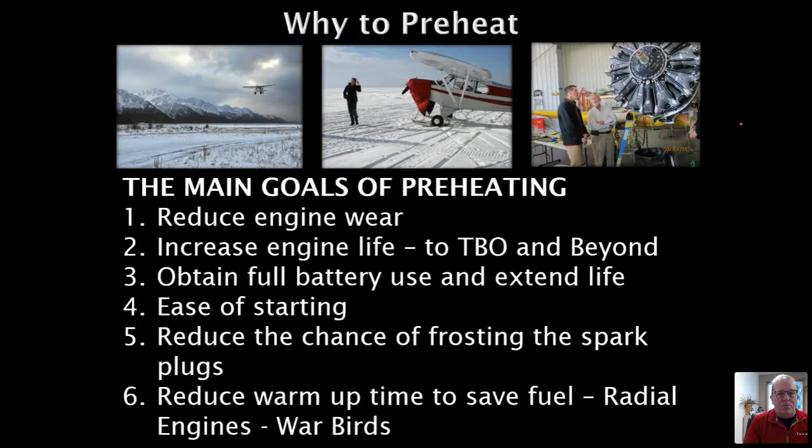And of course, especially flight schools, frosting the spark plugs can really ruin your flying day because it usually eliminates it. And we are now seeing a lot of radial engines and warbirds, open cockpits. They have to have oil temps at a certain temperature prior to flying, and we're helping them doing that.

Our piston engines, the cylinders have a taper to them, so again, expanding at different rates. Once the combustion process starts, everything starts heating up very quickly, but we don't get the proper oil flow. We might get pressure, but we don't get the proper oil flow through all of the journals and items that need to get the oil. So we don't want to be scoring your cylinder. Basically, we want to increase the ability for you to fly. So aviation safety does start with Tanis preheat.

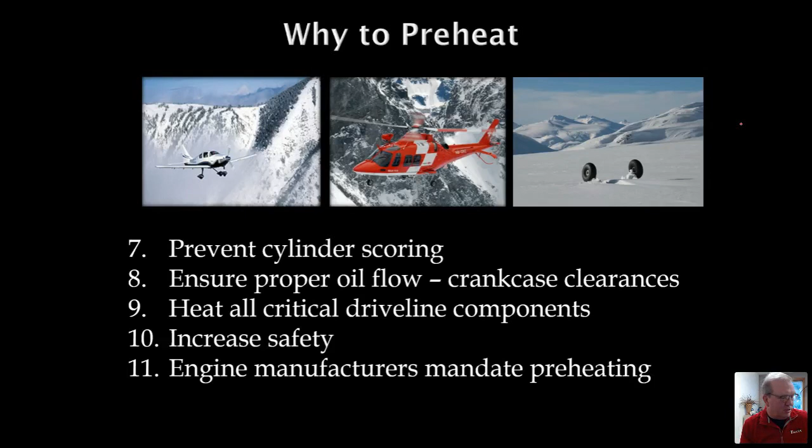And last and surely not least, as we just stated a little bit ago, engine manufacturers do mandate preheating at certain temperatures. So let's talk a little bit about what Tanis does when we look at saying, okay, we want to develop a preheating method that really works the best, covers all of the manufacturer's recommendations, and then even going up and above that.

So when we design a system, first of all, we want to see, and there's some variables in here, but number one, we design that system so that we get the cylinder head temperature about 50 degrees Fahrenheit above ambient. Now, granted, your ambient's going to be all over the place, and we'll circle back to that a little bit later in the presentation. So that's goal number one.

Goal number two, we want to get the oil temp at least 40 degrees above ambient, 35 to 40 degrees, but we also don't want to see the oil temperature above 120 degrees Fahrenheit and never warmer than the cylinder.

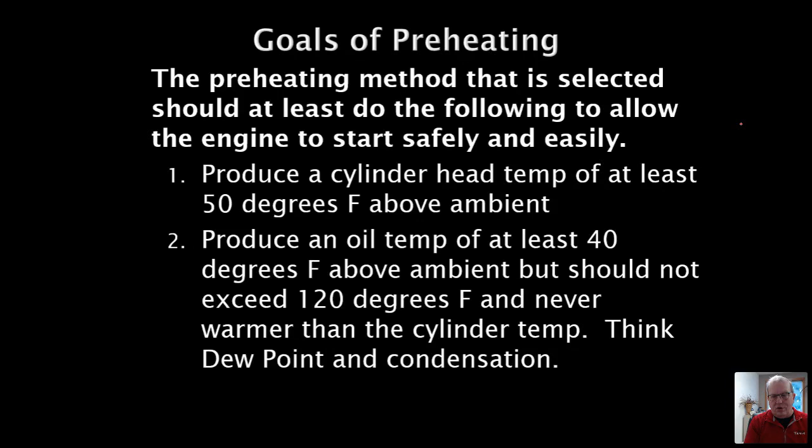And I'm going to jump into a little bit of physics, so there's a caution here. The reason we don't want the oil to be warmer than the top of your aircraft engine is moisture, water, condensation has been intermixed with our oil once we stop flying, and it will make its way to the bottom of the sump. But that water evaporates at any temperature. Of course, when you're plugging in a preheat system or heating it up, that evaporation rate expands and goes quicker.

And we talk about the wet washcloth. You leave it when it's hot and humid in the summertime, it stays wet all day.

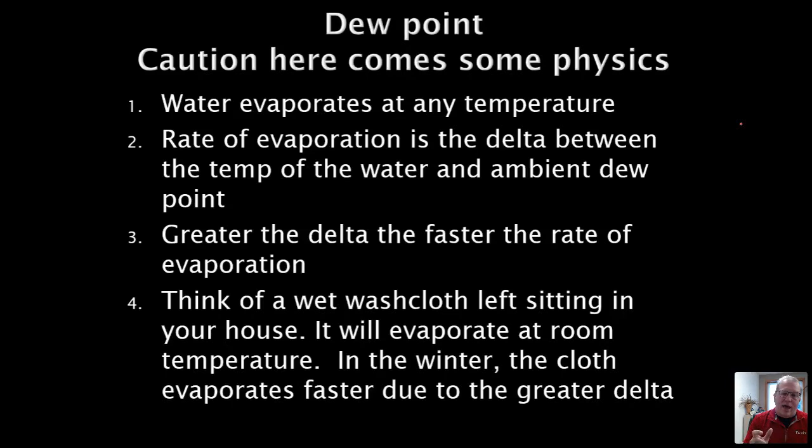But if you leave it in your house in the wintertime when we're using firewood or other type of heating, the delta will dry that washcloth off so quickly. So that's the physics side of it.

We want to make sure with our multi-point preheat system that we get the cylinder warmer than the oil, so that even then that moisture evaporates out of the oil into your crankcase. It cannot condense on anything because that metal, your cylinder, your piston, your valves, your cams on some of the aircraft engines are not covered with oil at that time, and they really could end up being cooler than the oil, and then that moisture will condense on it.

So we've designed our complete preheat system in such a way that you can leave it plugged in all the time. And I was answering a couple of the questions in the Q&A before I jumped on, because once I share my screen, I don't see the Q&A anymore.

That's why we say we can leave ours plugged in all the time. There's a reasonableness factor. If you're not going to be flying for several months, then you should look at ways to preserve your aircraft engine, and depending on if you have a partially heated hangar, things like that. But ours is really the only system that does that, because you will be able to see, and the slides are a little bit further down the line here, we get everything warmer than the oil. And that is the key of what we're doing.

And here's something I really want to be able to cement into your minds. We give you all this information. We're going to say, here's what you want to do, but you can test this out yourself. You can do really similar tests that we do by just taking a look, if you happen to be flying this aircraft, or if you have an engine monitor, you have cylinder head temperature and oil temperature at your disposal before you start that aircraft engine.

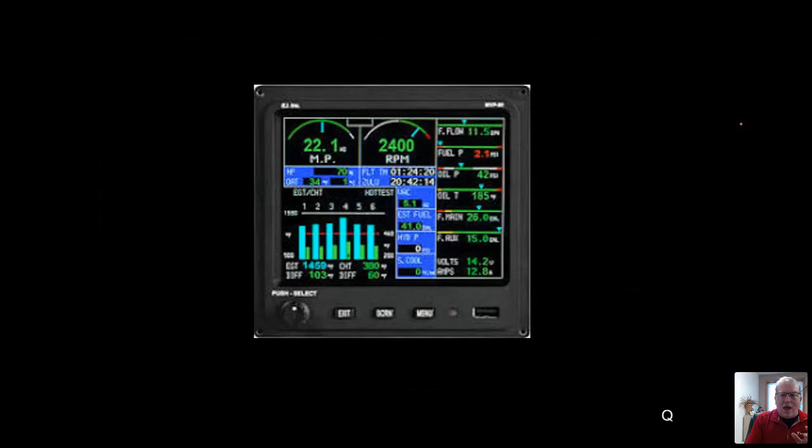So that is item number 2 that I wanted to leave you with. You have data that you can use to make a determination what's going to happen when I start up this aircraft engine.

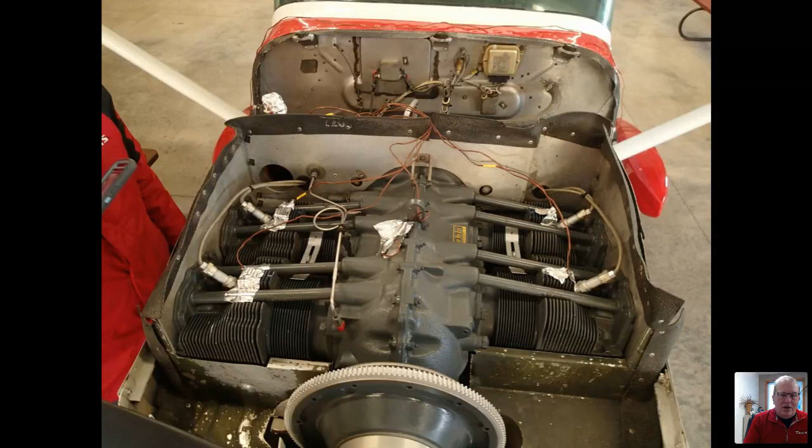Now, we, of course, use data loggers that are NIST traceable. So you see the little calibration tags on all of our thermocouple wires, and we take them and put them all throughout your aircraft engine opposite of where we're heating it, and we will put one down the oil fill tube to get one in the oil, so we get the oil temperature. Because even though I said you have that at your disposal with an engine monitor, that oil temp gauge may be someplace not necessarily right sitting where your oil temp is in the bottom of your sump.

So we go out and do temperature mappings all the time with insulated engine covers, without insulated engine covers, in a partially heated hangar, in an unheated hangar like you see right here. And then we get this data back.

We can do these tests any time of the year. It was 60 degrees, 65 degrees Fahrenheit. We got it up to 125, so that's our 50 to 60 degrees above ambient. And the oil temperature was 100, so we got that 35 to 40 degrees above ambient.

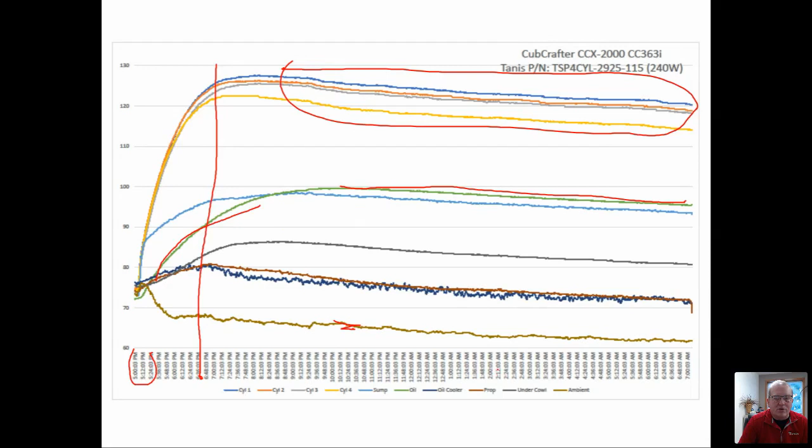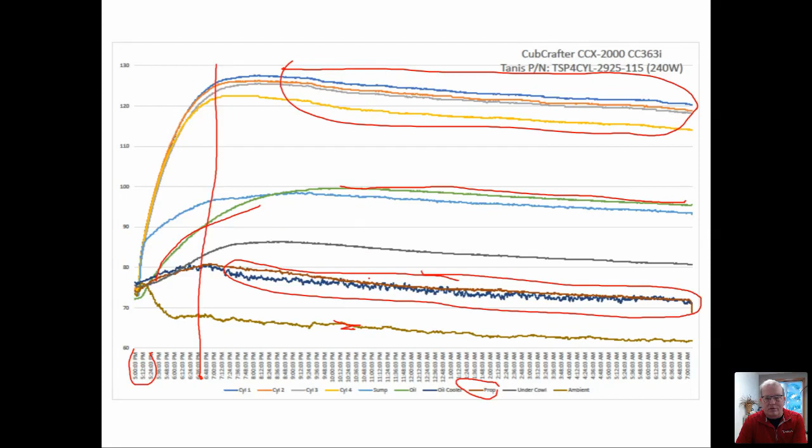One item that you will also see, I know it's probably an eye test here. Here's our prop temperature. We actually take a thermocouple and put it on the prop too, because you'll notice when we're preheating, guess what? We're also heating that wonderful, great big spinny thing in the front of our airplane. So if you're really in cold operating climates, having a prop cover does also give you some more utility, because we are losing heat outside of that prop.

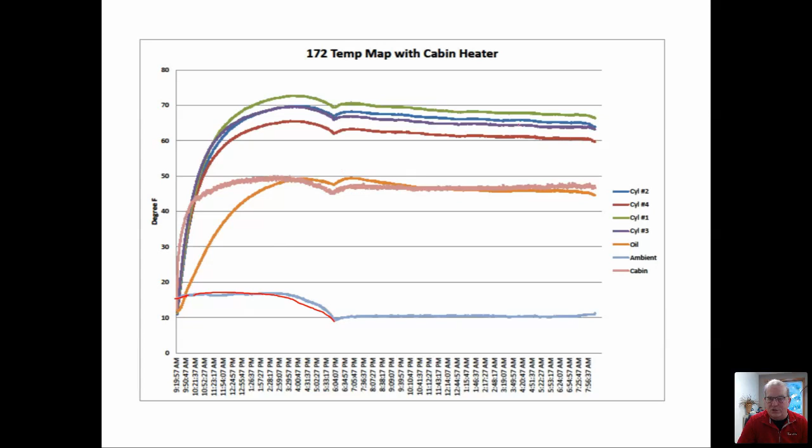The temperature in the hangar dropped down 5 degrees, so you're going to see that drop, and then it's just going to ride that curve throughout that period of time. But some people are saying, wow, 50 to 60 degrees, that's great, but I like to fly when it's much colder than that, all Fahrenheit. I need more heating than what your 50 to 60 degrees and 40 degrees above ambient will do.

That is when the insulated engine cover comes into play. You can just about double your performance of the heating if you use an insulated engine cover. You'll see the same thing we talked about earlier, an hour and a half to 2 hours - that's actually an hour, that one jumped up. We're at our optimum temperature. Then we added an insulated engine cover, and we got that. But it takes a lot longer period of time. So now you're talking about at least plugging it in the night before or the day before you go flying if we need that additional temperature.

Here's one where you do a bunch of these tests and get the data back, and you all of a sudden go, what in the world is happening here? We didn't have this great little line telling us that to start with - we had to figure it out. This was a flight school. They tuck in about 7 or 8 aircraft inside of a very large hangar with a large hangar door. The temperature of the cylinders was bouncing around all over the place until they closed the door. It wasn't that windy of a day - it was just showing you how effective our air-cooled baffles are on those air-cooled aircraft engines.

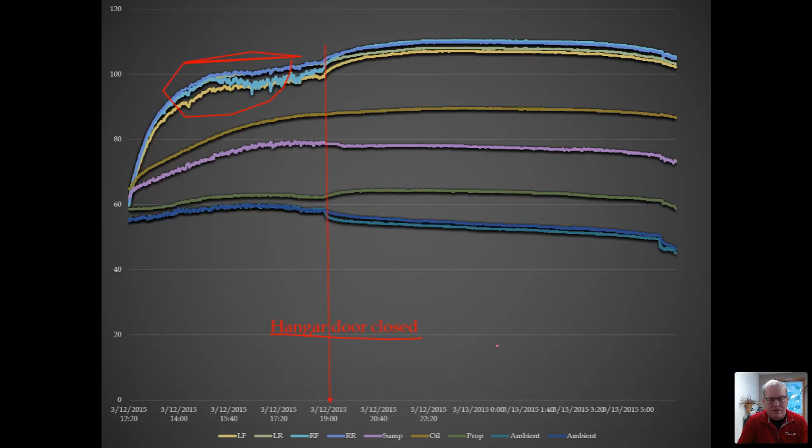So cowl plugs, another really, really important thing to use. If you're going someplace flying and you're going to be there for an hour and a half, 2 hours sitting outside, a set of cowl plugs will get you a long ways, even if you don't have an insulated engine cover. So we wanted to show you that so you could get a picture of what happens.

Now we're going to make a transition to say, well, there's many different types of preheat systems - furnaces, hot air that's blown in there, sump-only preheat systems, insulated engine covers, etc. We do tests on all different types of those. We had a flying club challenge us, saying, well Doug, we use a sump-only preheat system and we have an insulated engine cover that we put over top of it the minute we're done flying, and boy, that engine, I'm sure it's all the exact same temperature. Well, we did a test for them, and what they found out was a little shocking.

Even with that insulated engine cover in there, you see this difference of temperature. This is their oil, here are their cylinder head temperatures. You've just set yourself up for a case where a question was asked earlier: can I leave mine plugged in all the time, or should I do it just before I fly? If you have a sump-only preheating system, you should only plug it in prior to flying, a couple hours before, because you don't want to plug it in the night before, have this happen, and then the weather closes in on you and you can't fly the next day, because now you've deposited some condensation above your oil line in your aircraft engine.

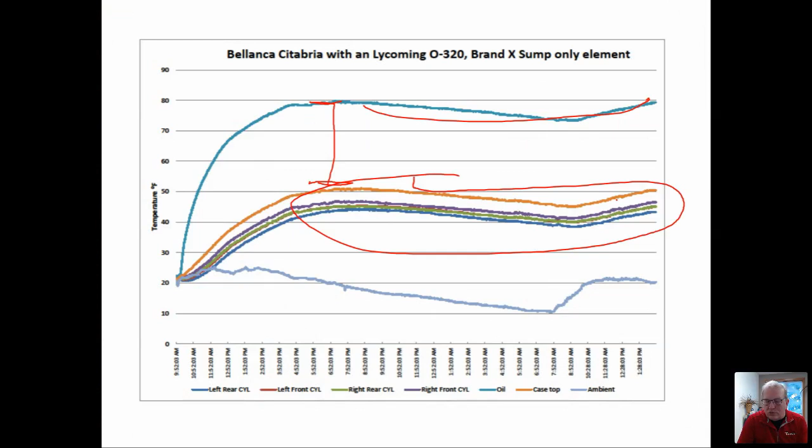If you fly it soon, you're okay, but if you don't fly for another week or two, you start going down a road we don't want to see. What happens now - we took that preheat system off that exact same aircraft engine and installed ours. Here's the oil temp, here's the cylinder head temperatures, and yes, you see that wide swing - we just follow that ambient curve. That is really the key of what we're talking about and what we're doing with our preheat system.

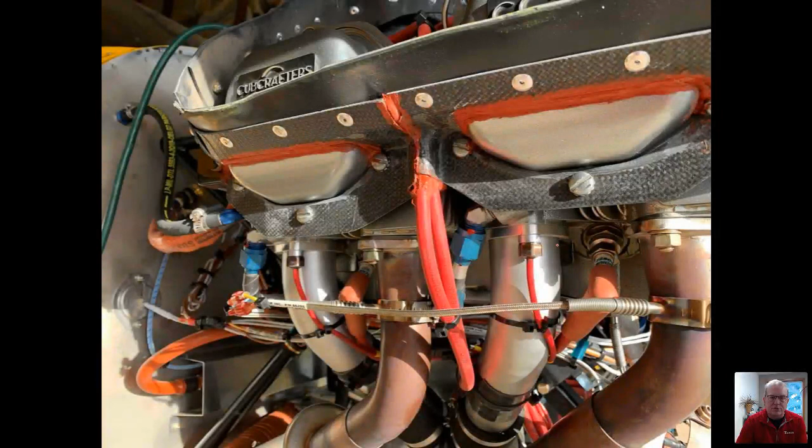So what is our preheat system? If you aren't familiar with TANIS, what does it look like? We have a threaded element, a little bolt.

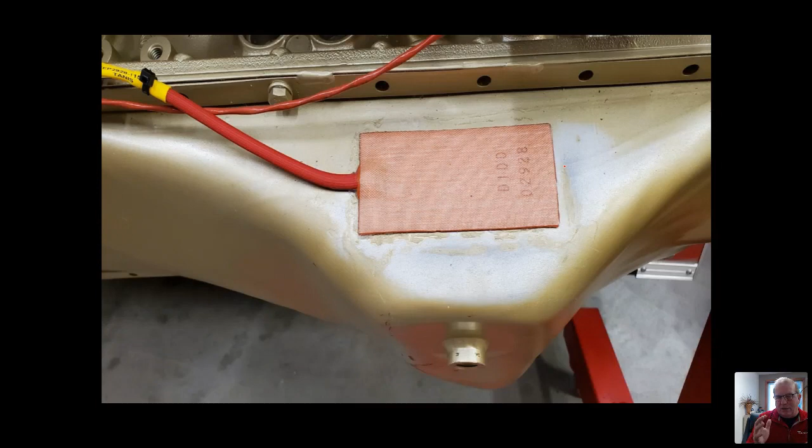We take either the intake tube fastener or one of the rocker cover fasteners and replace it with a heating element, one per cylinder, plus a pad that on a 6-cylinder aircraft you'll have one on top of the case and one on the bottom. If it's a 4-cylinder, it's just on the bottom of the case because the engine weight is less than the wattage needed to run all the way through.

So that's our system, that gives you the snapshot of it. Then the question comes, well, how do I know if my TANIS preheat system is working, or really anybody's system?

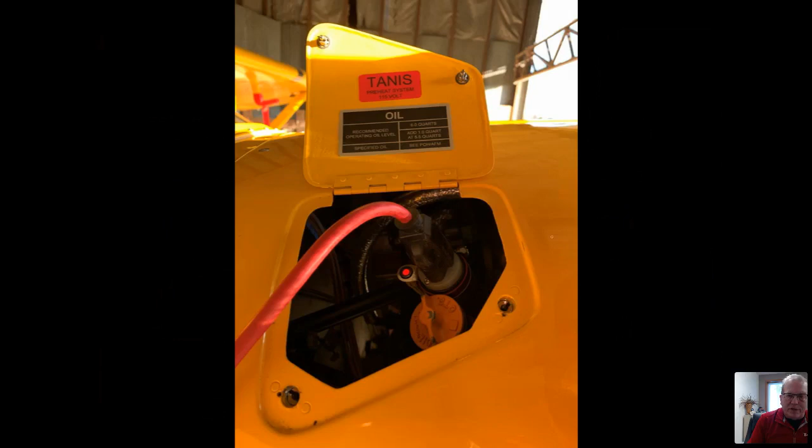I'll give you a real quick one. If you have an engine monitor, you'll be able to know it's working by looking at your CHT temperatures or your oil temperature. Or if you don't have one of those, and you have our system, we have an indicator light telling you at least you've got power to your system. It doesn't tell you every element is working, but you at least know the extension cord hasn't gotten pulled off from the other side.

But here's one real quick and easy way everybody can use. Keep these in your hangar wherever you plug your extension cord in - buy one of these inexpensive watt meters, maybe $30-40. Whatever system you're using, they should list the wattage. Our 4-cylinder systems run about 240 watts plus or minus 10%, because we do everything at 115 volts and 230 volts. Our 6-cylinder system runs about 460 watts. So that's a feedback mechanism to know that your preheat system, every element, is working for you. Very quick and easy.

So I said I was going to talk a little bit about installation and service. If the fuses are blown, you don't just replace the fuses and plug it right back in. You go take your ohm meter reading - hey, something's shorted out here. Now just disconnect - we have environmentally sealed connectors, they're Deutsch DT connectors, TE. You disconnect them, plug them back in, and check what your ohm meter does. Once you unplug the one that's shorted out, you'll see the ohm meter go up, and you can go from there.

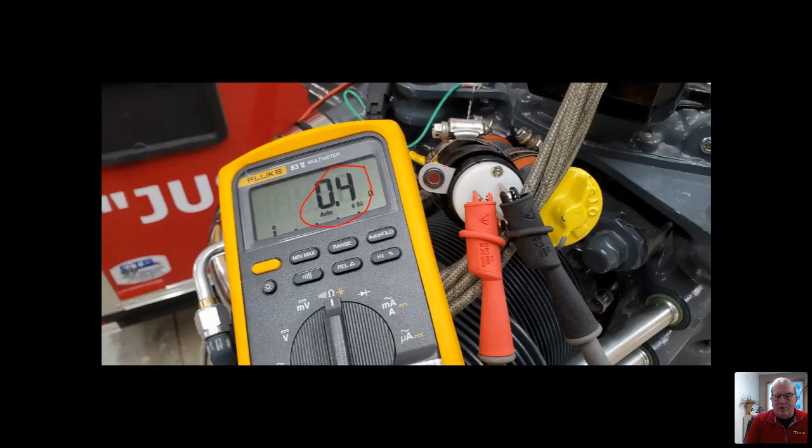A dehydrator does a great job of pulling that moisture out of your aircraft engine. It's really more for summertime flying, or if you're by the coast where you have salt water—really important to deal with, to get the moisture out so we don't deal with that issue.

One of the things I wanted to talk about—you can leave yours plugged in all the time, but there's a reasonableness factor. You don't have to. You can plug it in the night before, but some of us live 40, 50 miles away from the airport, and that's inconvenient.

We came out with a device just this past September called Switch-On, our preheat remote. We use the data side of the cellular towers to communicate with this device, to turn it on prior to flight—an hour and a half to two hours if you have a sump only, or the night before if it's ours.

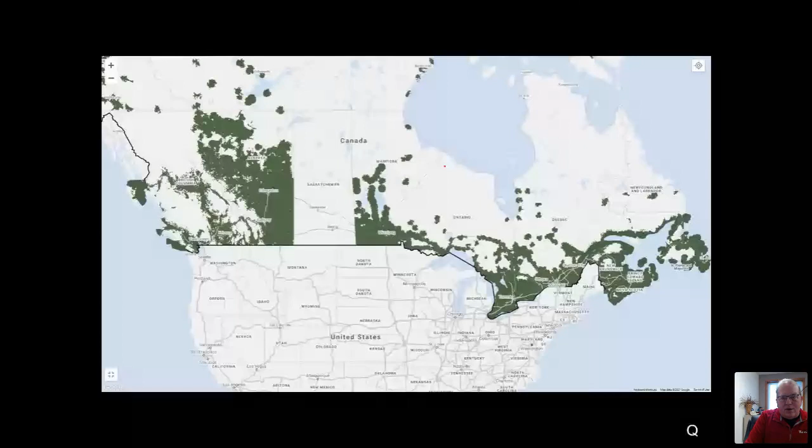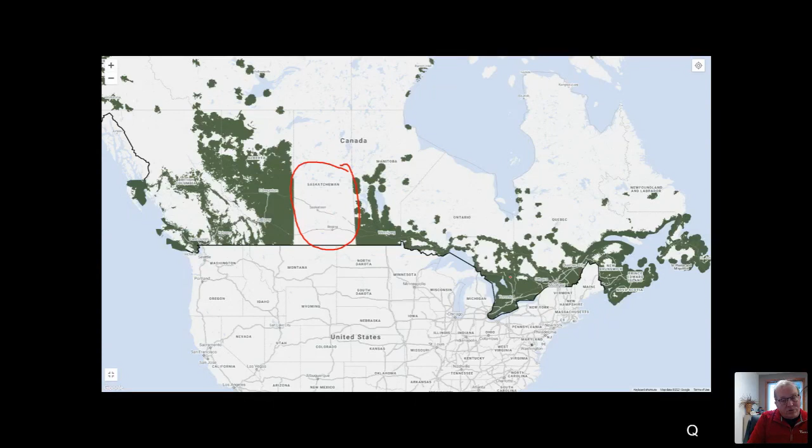We are launching that product out in Canada now. Go to switchon.ca or switchon.com, and if you're in Canada, it'll connect through you. We're using the TELUS network, so you'll see the green spots. For anybody in Saskatchewan, sorry, no coverage there. It doesn't have full coverage yet, but it's another option for you to be able to turn your preheat system on.

There are two channels on that item, so you could use one for a cabin avionics heater, one for your aircraft, maybe even two aircraft. You can share it with a customer of yours too, but I just wanted to talk to you about that item.

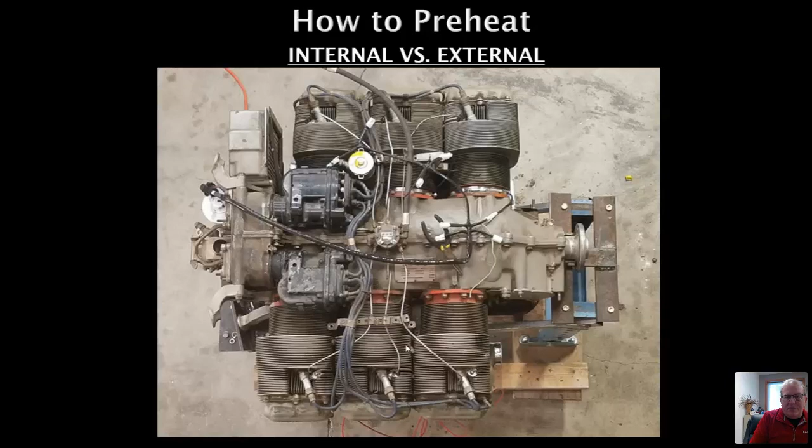Now, there are many different types of preheat systems. People will say, 'Hey, I use a heated blower to blow a lot of hot air underneath in the cowl, and that really warms up my engine.' Well, it does to the touch, but inside, it really doesn't.

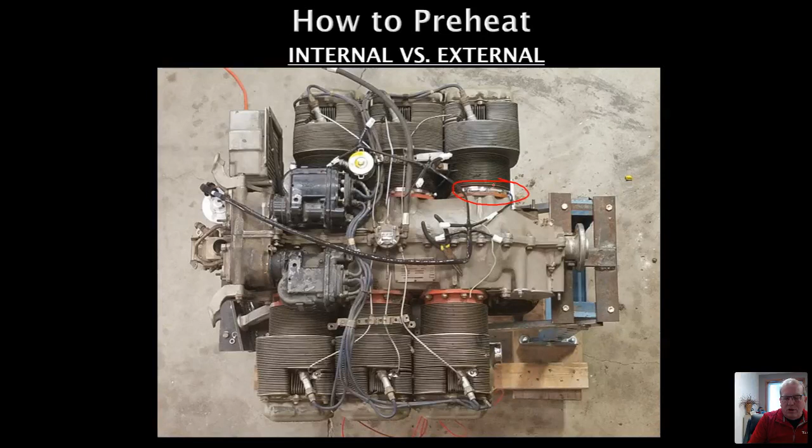There's another brand of preheat system that uses a hose clamp around the base of the cylinder. When we do a thermal imaging test on that, you'll see our preheat puts 50 watts of heat into each of those cylinders, and 100 watts of heat into others. The air-cooled baffles do a great job of cooling everything off.

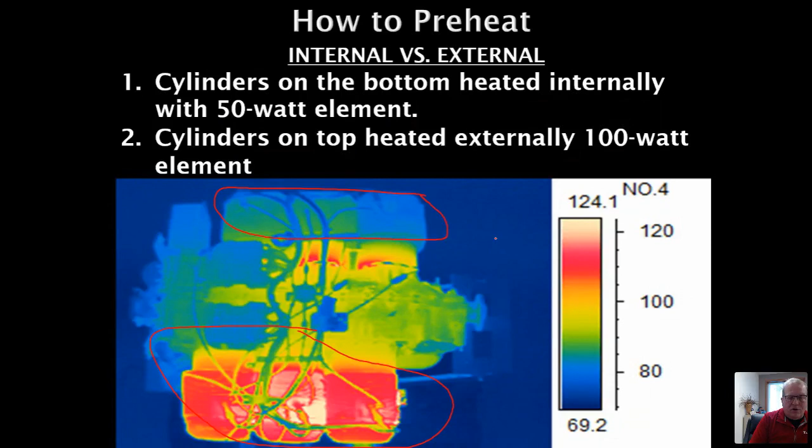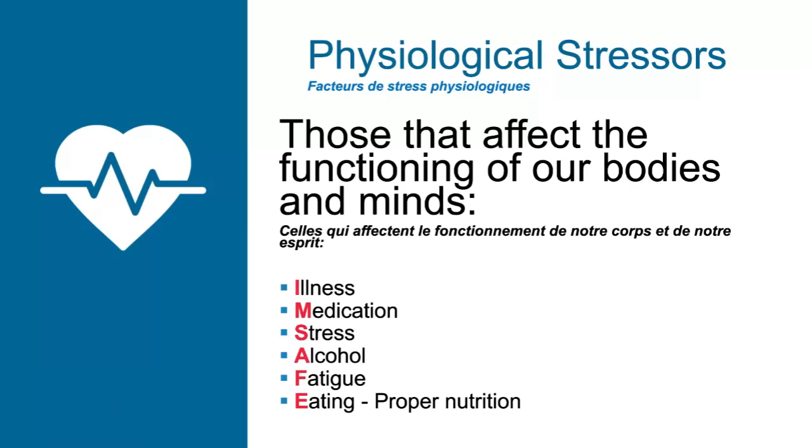Winter flying brings with it the risks of off-airport landings. How well prepared are you for the possible walk in the cold and/or the snow? Those lightweight boots you wore to the airport in your nice warm car may not be so suitable for even a short trek to the farmhouse in the distance if you happen to put down in a farm field. Now think about what happens if you land on a frozen lake miles from the nearest buildings. You and your passengers need to be dressed appropriately for the weather conditions on the route, not just for the drive to the airport.

Winter weather conditions vary considerably in cold climates. In the most remote sections of the world, weather reporting stations are generally few and far between, and reliance must be placed on pilot reports. However, don't be lured into adverse weather by a good pilot report. Winter weather is often very changeable. One pilot may give a good report, and 5 or 10 minutes later, VFR may not be possible.

Near large bodies of water, you may have to deal with highly localized lake effect snow squalls that don't show up in forecasts. Keep in mind the effects of local terrain. Even elevation changes of a few hundred feet can trigger localized weather. In particular, mountain flying and bad weather don't mix. Set yourself some limits and stick to them.

Setting up a winter-friendly route can be very important. If your trip is over highly populated areas, the risk of finding yourself in a winter survival situation can be minimal. However, most of Canada is wilderness, and it's not a bad idea to plan a route that keeps you close to a better chance for recovery in the event of a forced landing. Staying close to highways is a good strategy, and vehicles traveling on those roads can offer good visual cues regarding what may lie ahead. For example, if you notice the vehicles headed towards you have lights on in broad daylight, it may be a clue that you are headed to an area of poor visibility.

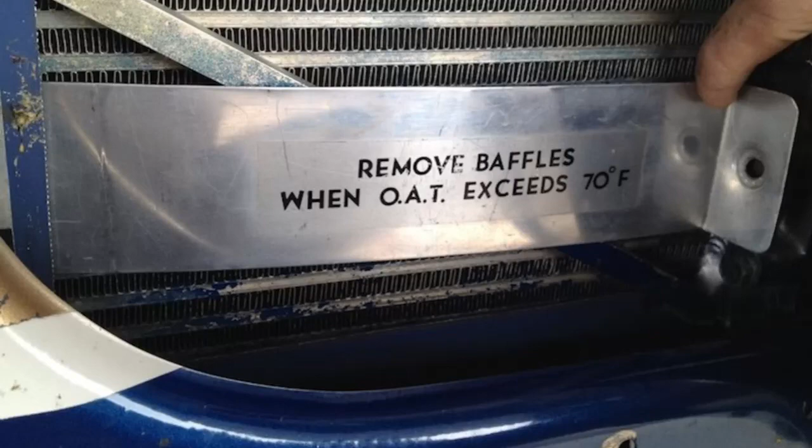For baffling and winter covers, be sure the winterizing of your engine follows manufacturer recommendations. Does your engine require a winter kit, such as air intake baffles to keep cylinder head temperatures within limits? Some engines require a baffle on the oil cooler air intake to keep oil temperatures within limits. Are these properly installed? When looking at oil, many engines require different grades of oil depending on the outside air temperature you may be experiencing in your region.

The crankcase breather deserves special consideration in cold weather preparation. A number of engine failures have resulted from a frozen crankcase breather line, which caused pressure to build up, sometimes blowing the oil filler cap off or rupturing a case seal, which caused the loss of the oil supply. The water, which causes the breather line freezing, is a natural byproduct of heating and cooling of engine parts. When the crankcase vapor cools, it condenses in the breather line, subsequently freezing it closed. Special care is recommended during the pre-flight to assure that the breather system is free of ice. If a modification of the system is necessary, be certain that it is an approved change so as to eliminate a possible fire hazard.

For hoses, hose clamps, hydraulic fittings, and seals, an important phase of cold weather preparation is inspection of all hoses, flexible tubing, and seals for deterioration. After replacing all doubtful components, be certain that all clamps and fittings are properly torqued to the manufacturer's specifications for cold weather.

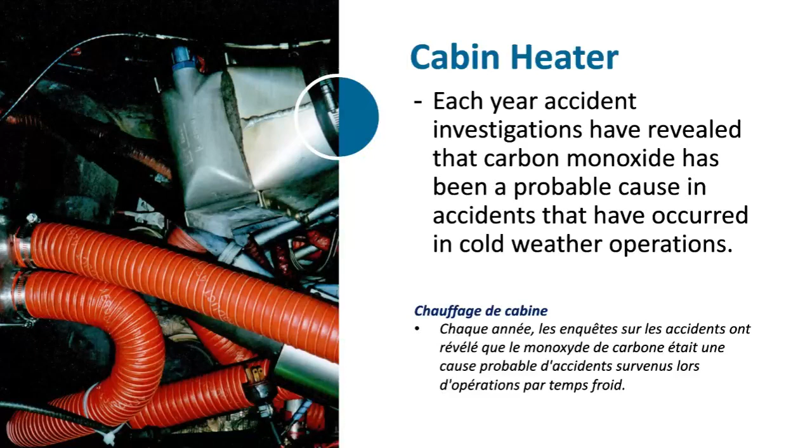Many aircraft are equipped with cabin heater shrouds, which enclose the muffler or portions of the exhaust system. It is imperative that a thorough inspection of the heater system be made to eliminate the possibility of carbon monoxide entering the cabin or cockpit area. Each year, accident investigations reveal that carbon monoxide has been a probable cause in accidents that have occurred in cold weather operations.

Because of contraction and expansion caused by temperature changes, control cables should be checked and properly adjusted to compensate for the temperature changes encountered.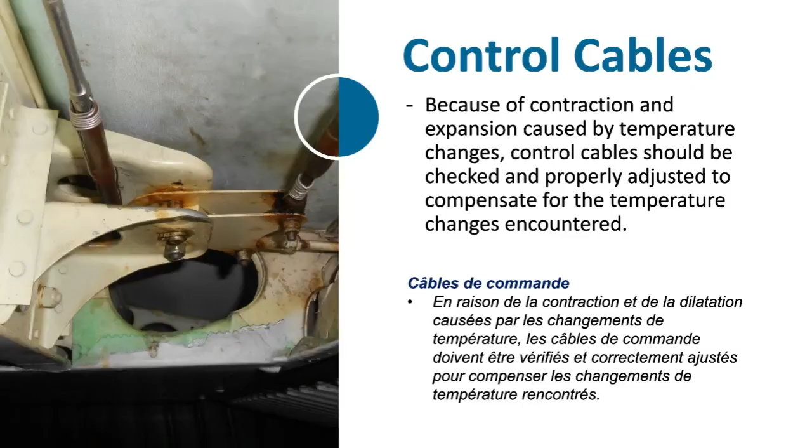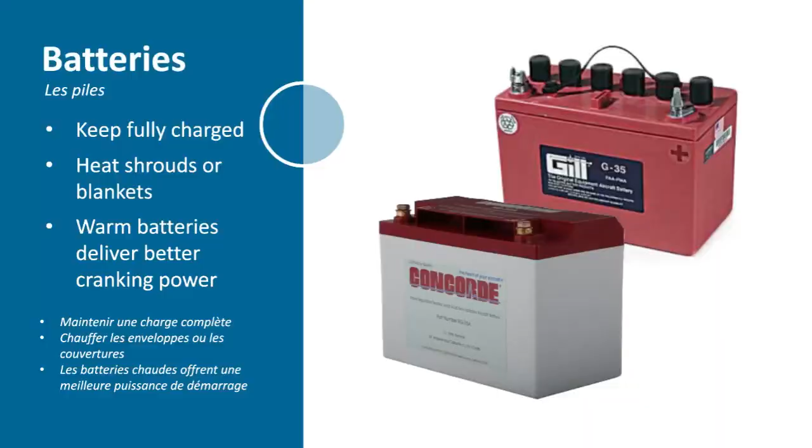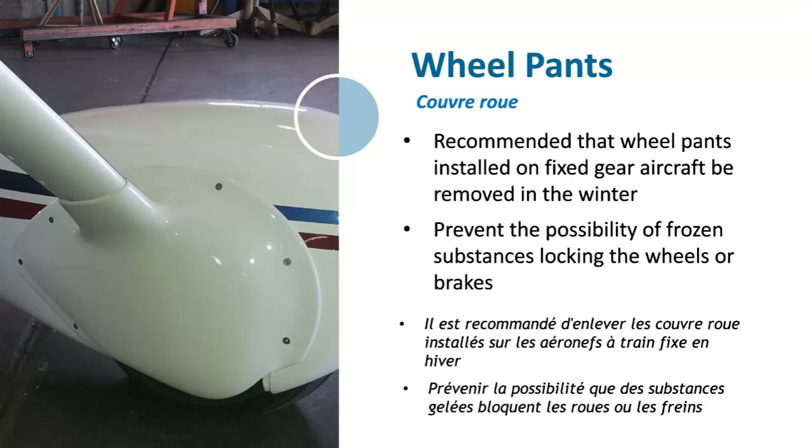It is recommended that wheel pants installed on fixed gear aircraft be removed in the winter to prevent the possibility of frozen substances locking to the wheels or brakes. Let's take a look at this video on pre-flight procedures in the winter.

The winter months can bring beautifully smooth, dense air that truly makes flying enjoyable. Unfortunately, the same cool temperatures that make the air smooth can also present various challenges to pilots of all general aviation aircraft.

Extra care must be taken to ensure that the aircraft is safe to fly, and this usually means spending extra time outside in the elements. So dress appropriately for the cold temperatures.

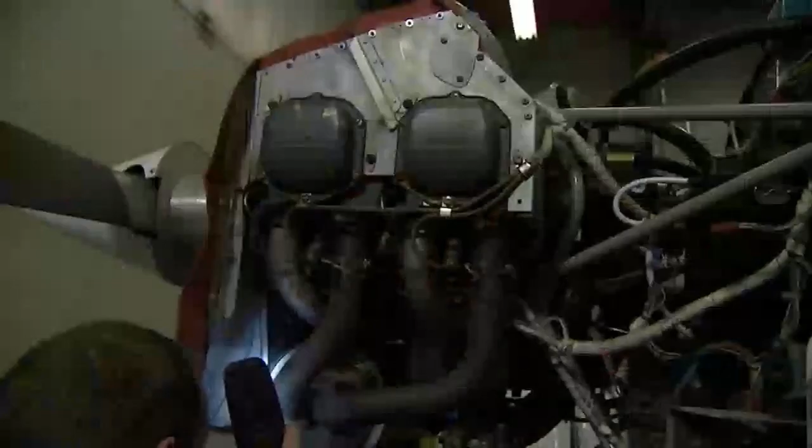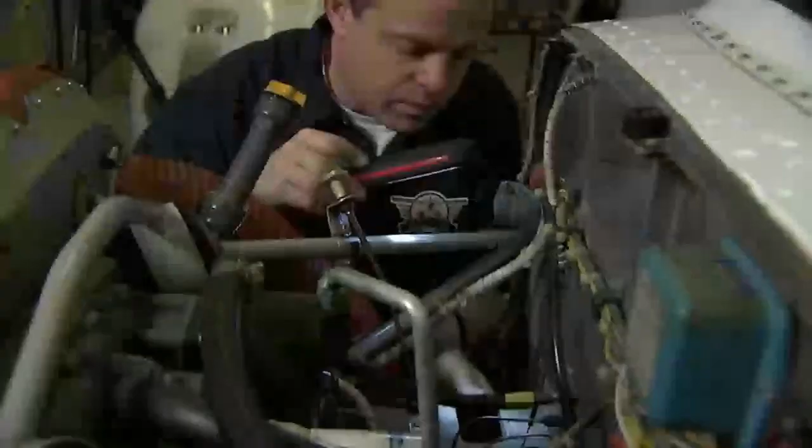Keeping your aircraft properly maintained is the first step to ensuring the aircraft is ready to fly. Have your AME specifically check the cabin heating system before the cold weather sets in. Any cracks in the system can allow carbon monoxide to enter the cabin, and since carbon monoxide cannot be smelled, it's a serious threat to the safety of your flight. Also be sure to keep an up-to-date carbon monoxide detector in the aircraft.

Although always a critical component of a safe flight, a walk around is especially important when the weather hits, particularly if the aircraft is left outside or in an unheated hangar. Frost, ice, and snow can easily make their way into places where they shouldn't be.

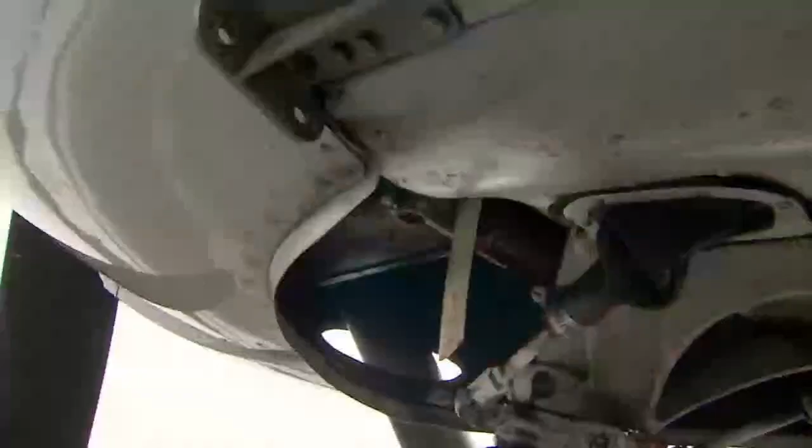The engine breather tube is often not checked as part of a standard visual inspection. In fact, many pilots are unable to show where it's located on their aircraft. Talk to your AME about how to properly inspect the breather tube and any other aircraft-specific equipment that you're not familiar with.

Be careful to inspect all the critical surfaces, especially the hinges and cables on the control surfaces, to ensure they have full and complete uninhibited movement. Remember that the CARs mandate that all critical surfaces are to be free of contaminants. Even a thin layer of frost is not allowed and must be removed prior to flight.

The braking system is especially prone to malfunction while operating in colder temperatures. The wheel pants, although nice to look at, are difficult to inspect underneath and can easily become filled with snow and ice. The fuel system of a typical light aircraft is usually fairly simple.

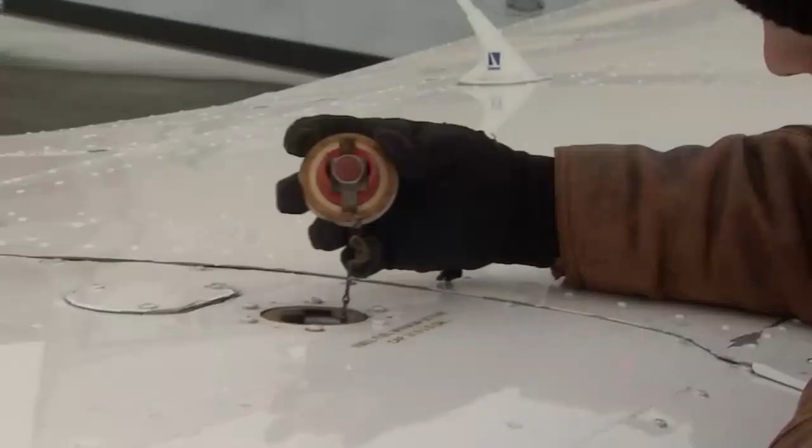However, it's also prone to failure if not understood and inspected properly. Pay extra attention to the fuel caps, ensuring that they're not bent or damaged, allowing water and other contaminants to enter the fuel tanks. If they're vented caps, make sure they're not blocked by ice that could prevent them from being able to do their job in the event the fuel vent becomes blocked.

If there's water in the tanks, be extra vigilant to ensure it's completely removed. Even a small amount of water entering the fuel line and freezing can completely cut off the engine's fuel supply.

Finally, a cold-soaked engine is not fit to be started. Any engine that has been exposed to temperatures below -7 degrees Celsius, including the wind chill factor, should be thoroughly preheated. Consult your POH for specific recommendations from your aircraft manufacturer.

Preheating will ease the starting process, but it also helps to prevent unnecessary wear and damage to the engine. If the engine is started without being properly preheated, the oil can congeal, preventing proper flow throughout the engine.

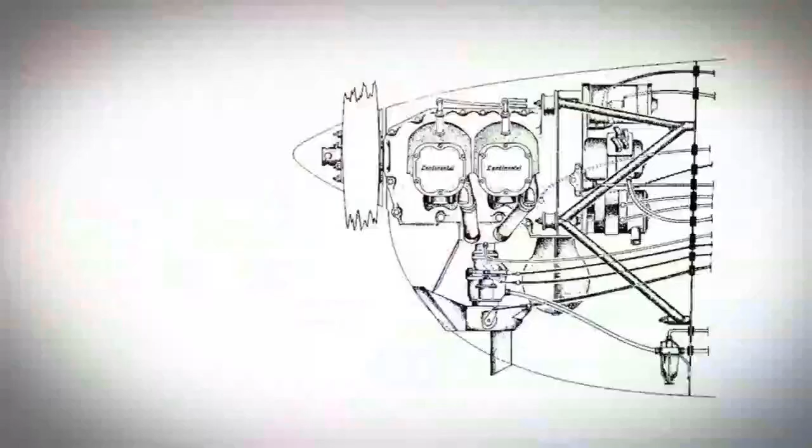If a heated hangar is not available, an electric low-voltage preheat system is the next best option. A low-voltage system that heats both the oil sump as well as the engine cylinders, along with a thick engine cover or blanket, can adequately heat the engine to proper pre-start temperatures. Although this method takes a long time to be effective, if you plan ahead and plug the aircraft in the night before your flight, it will ensure the airplane is ready to start when you arrive.

One last option is to use an external blower-type engine heater. This, however, is the most abused method of preheat, as the engine is often only superficially heated. Be careful not to heat just the cylinders. The heat should be directed to the engine's sump and lines as well as the cylinders.

A superficial application of preheat can result in engine damage. It may be enough to get the engine started, but it will not decongeal oil in the sump or lines, and a lack of lubrication may result, which can cause a complete engine failure shortly after the application of a high power setting. Above all, don't be in a rush to get airborne.

Take your time to do things right and ensure your aircraft is truly airworthy. And that way, you'll be better able to enjoy the smooth, dense air of the winter months.

Okay, so let's review the video key points.

Although Lycoming's advice is that any start below -7 degrees is a cold start and should not be attempted without a thorough preheat, it is advisable to preheat anytime the outside air temperature is 0 degrees or colder.

By now, we all know that leaving even a thin coat of frost on wings, tail, and control surfaces can have fatal results. That doesn't mean it's okay not to clean the other areas such as the fuselage and cabin roof. Snow and ice that dislodges from these areas can damage the tail.

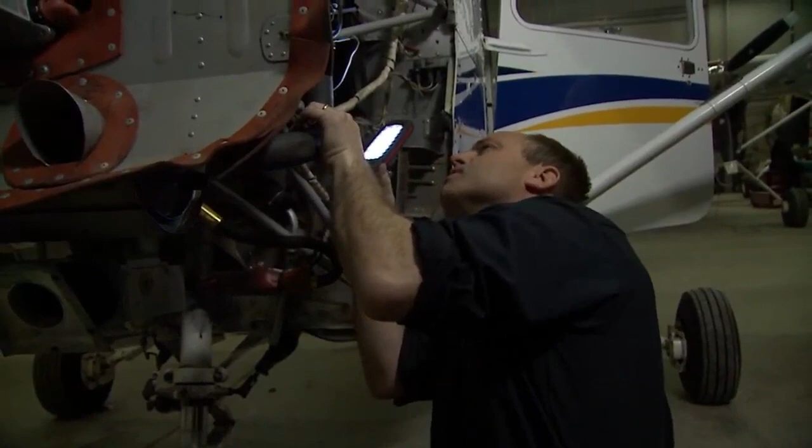It's recommended that the pilot in command monitor the application of Type 1 fluid to ensure that it's not directly sprayed on engine openings, windows, pitot tubes, and static ports. And if the de-icing fluid does get onto those areas, it's the PIC's job to ensure that they're cleaned and that the aircraft is still airworthy.

And if you aren't able to depart soon after your aircraft is de-iced, remember to check the critical surfaces once again before takeoff. Depending on the atmospheric conditions, frost or other contamination can form quickly and you may not be able to see it from the cockpit. Keep in mind that there's no such thing as just a little bit of ice. So allow lots of extra time to ensure the aircraft is clean and ready for a safe flight.

Airframe de-icing systems may be available at some airports. Glycol or Type 1 solution is the most expensive solution for GA pilots, and it is generally only available at select FBOs. Other more sophisticated de-icing materials are available, but the expense, weight, and requirement for sophisticated application equipment means only scheduled carriers will benefit from their use.

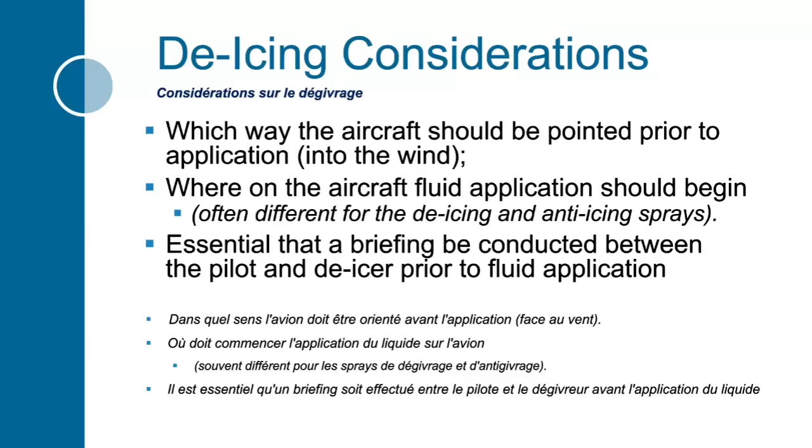So, what can we use on our own GA aircraft? Polypropylene antifreeze is pink in color and is available at RV, automotive, or marine stores. Placed in a small garden sprayer, it works quite well, especially if the sprayer is heated to room temperature. A note of caution though, composite aircraft owners should test it in an inconspicuous area first, as there have been reports of staining.

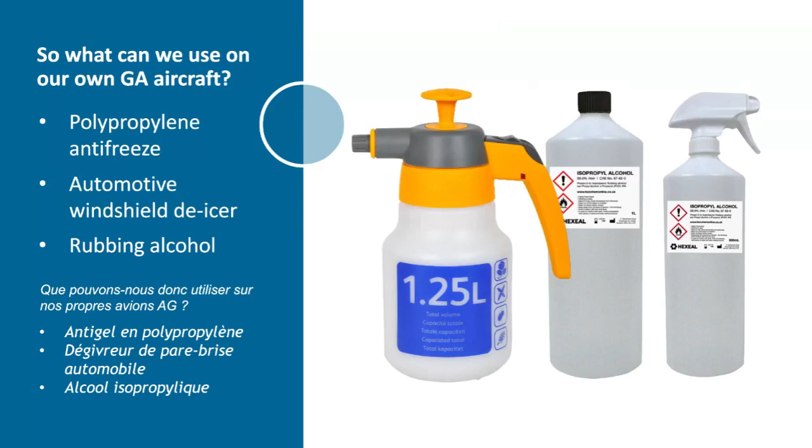Automotive windshield de-icer in a spray can is inexpensive and can be purchased at gas stations and department stores. Do not use it on aircraft windshields or windows. It's the easiest to carry, and unless the airframe is heavily iced, will yield several applications. Rubbing alcohol, sold in relatively small quantities in drugstores and supermarkets, can work in a pinch using a spray bottle with a hand pump. With the exception of glycol, these products are inexpensive to purchase and should be used liberally. Remember, you want the aircraft to become airborne.

And now we'll look at snow-covered airports. Winter flying often means you will be parking, taxiing, taking off, and/or landing on contaminated surfaces. The surface is considered to be contaminated whenever standing water, ice, snow, slush, or frost in any form is present. Operating on slippery surfaces adds a whole new dimension of risk. It's important to plan ahead and be aware of the conditions of your departure and arrival airports. The simplest thing is to call your airports ahead of time and ask about the conditions at the time of your flight.

If you are planning on flying to a larger airport where runway conditions are published via NOTAM, are you aware of the new format and how to read it? Runway surface conditions used to be contained within a NOTAM-J, but now will be in an RSC NOTAM. So why did the format change? The International Civil Aviation Organization has developed a new globally harmonized methodology for runway condition assessment and reporting called the Global Reporting Format, or GRF. The implementation date for GRF in Canada was August 12, 2021.

The Global Reporting Format and associated developments are important safety initiatives intended to mitigate the hazards associated with operating on wet and contaminated runways and the associated risks of runway excursions. The GRF safety initiative resulted from the efforts of various civil aviation authorities, major aircraft manufacturers, and many others, including pilots associations and airports. Hazards and risks associated with aircraft operations on wet or contaminated runways, as well as numerous accidents that have occurred during these conditions, are well known and have been thoroughly documented. Runway overruns have been on the Transportation Safety Board's watch list since 2010.

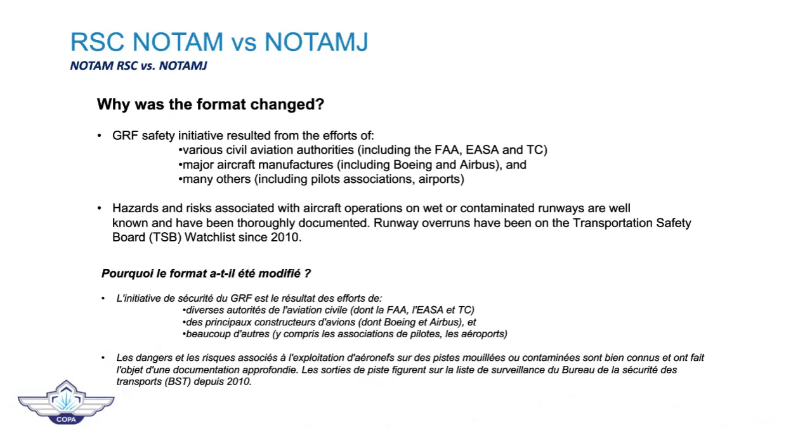Canadian implementation will meet the intent and important safety elements of the GRF, but will also provide some enhancements. One of the main differences from the ICAO format is the ability to report 2 contaminants. Reporting 2 contaminants will allow pilots and flight dispatchers to accurately determine the maximum allowable takeoff weight or distance, since the limiting contaminant is not the same for all airplanes. It also harmonizes the reporting in North America, since the United States Field Condition NOTAM also lists 2 contaminants.

The format of the RSC NOTAM will look different. RSC NOTAMs will use the standard field headers. Some runways will now be reported in thirds rather than as an average across the full length. The RSC NOTAM also includes the new runway condition code.

With the new GRF, standardized common terminology and phraseology for the description of runway surface conditions can be used by aerodrome operator and inspection personnel, air traffic controllers, aircraft operators, and flight crew. This is a significant safety enhancement. A maximum of 2 surface descriptions can be reported, either by third or for the full runway length.

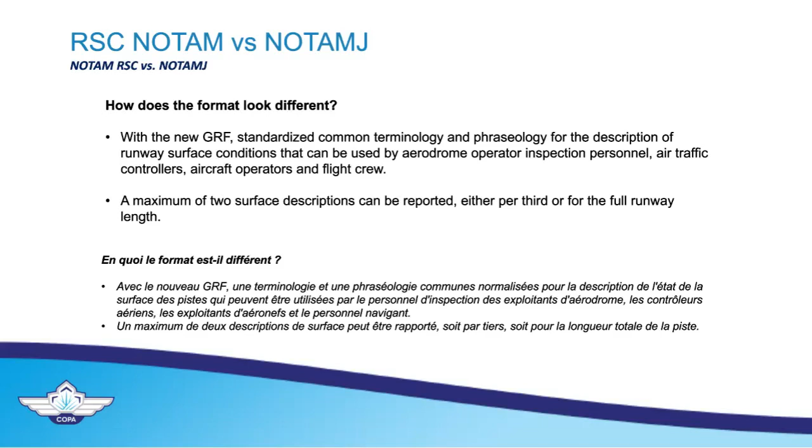A runway or runway third is only reported dry in certain circumstances. As the percentage of snow no longer needs to add up to 100%, as the percentage of coverage no longer needs to add up to 100%, dry is no longer reported if other surface descriptions are present, and the location of some of the information within the NOTAM has moved.

So thinking in thirds, the RSC NOTAM gives airport operators the option of reporting the runway conditions either by full length or in thirds. Reporting the runway condition information in thirds with the associated runway condition codes provides useful information for pilots, and we will cover what these runway condition codes are in just a few slides. This format helps to improve situational pilot awareness by identifying where the contaminants that affect airplane performance and directional control are located on the runway.

The runway condition is reported in the direction of flight by dividing the runway into 3 portions. The values are then reported in the direction of flight, providing touchdown, midpoint, and rollout observations. Both RSC and CRFI can be reported by thirds.

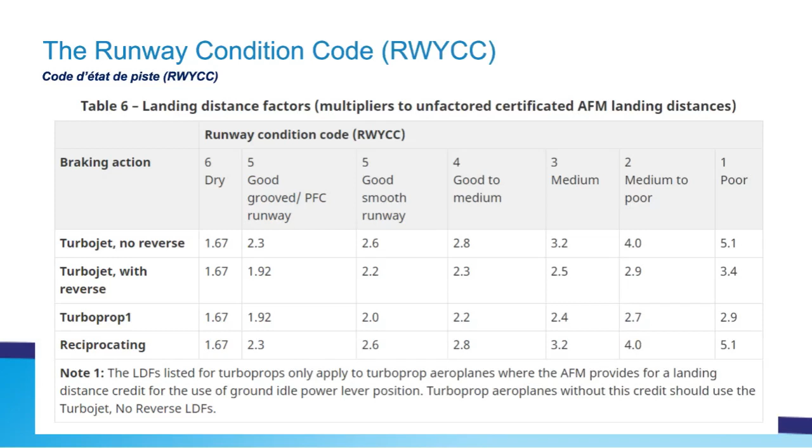So how will these runway condition codes apply to general aviation? The advisory circular provides guidance on how to use them. This table shows the recommended landing distance factors to apply based on the runway condition code. The landing distance factor includes a 15% safety margin and is applied to the unfactored distance you can find in your pilot operating handbook. For example, if the current runway condition code is a 4, you would find your unfactored landing distance from the POH and multiply it by 2.8 for a reciprocating engine aircraft to find the recommended distance required for landing.

Taking a look at the Canadian Runway Friction Index. Airports that are maintained to ICAO standards measure the friction index of contaminated runway surfaces, and the published result is the CRFI. This is expressed on a scale from 0, with no traction at all, to 1, meaning excellent traction. You can use the table published in the AIM and the CFS to judge the suitability of the surface for your plane and skill level.

An example of the CRFI diagram appears in this slide. In the example shown, the wind is 40 degrees off the runway at 20 knots. We can see a headwind component of 15 knots and a crosswind component of 13 knots. As you can see from the CRFI line below, the minimum recommended CRFI for takeoff or landing in these conditions would be 0.35.

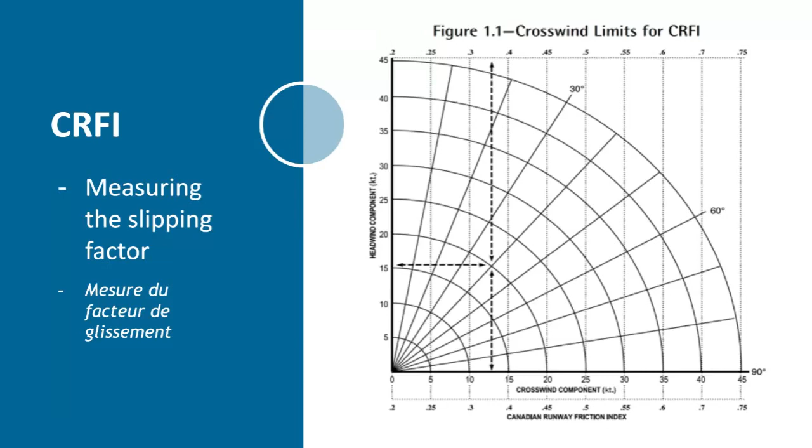Following the runway surface condition reports in an RSC NOTAM is a section for the Canadian Runway Friction Index readings. Like the runway condition codes, some runways will be reported in thirds and others will be reported over the average length of the runway. However, it should be noted that the CRFI reporting is not an element of the runway surface condition reporting. The CRFI section will appear in the RSC NOTAM regardless of whether an observation was taken or not. In cases where a CRFI observation is not available, the term NR or not reported will be stated.

The CRFI is deemed additional non-global reporting format, or takeoff and landing performance assessment information, as evidenced by the header which appears in the RSC NOTAM. Concluding the RSC NOTAM are 3 separate remark sections for taxiway and apron conditions and any other general remarks.

Some aerodromes will report runways in thirds and include runway condition codes, and others will not. While all aerodromes will use the RSC NOTAM format, whether its runways are reported in thirds or by full length is determined by the airport operator. This decision will be made in consultation with air operators and in consideration of the types of aircraft using the aerodrome. In general, pilots can expect longer runways to be reported in thirds and shorter runways to report by full runway length. Whatever approach is taken, aerodrome operators are encouraged to remain consistent within a season.

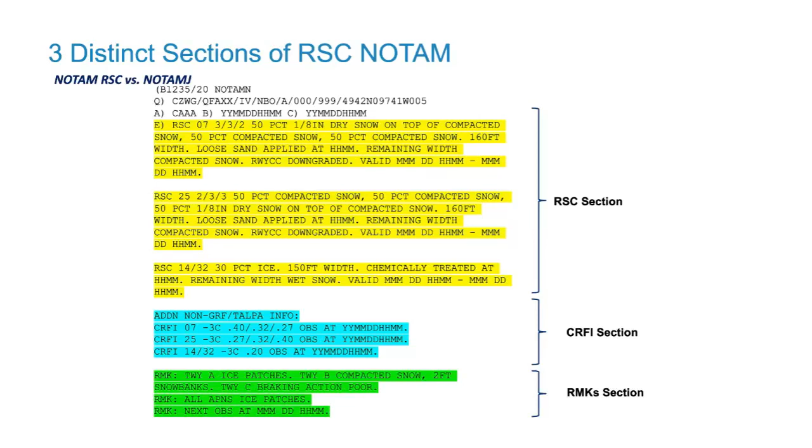In the final section, you have the remarks, where you will find the taxiway apron information and general remarks.

There'll be some differences, so let's look at some of the ways the RSC NOTAM will differ from the NOTAM-J. This example shows both reporting by thirds and reporting by full runway length. The new format also includes a more spaced out format for easier reading.

Up to 2 runway surface conditions are allowed to be reported. Dry will only be reported when 100% dry. As a result, the total does not have to add to 100%. You can tell when 2 conditions are reported for certain sections by the word "and."

Fractions will be used instead of decimals for depth measurement, and full text will be used more often.

More information on the RSC NOTAMs can be found in the materials listed for references. They are the Advisory Circular 700-057, Section 8 of the Canadian NOTAM Operating Procedures, as well as AIC 24/21.

So, tips for winter airport operating conditions. At most small airports, you are on your own. You can call ahead and ask the airport manager about conditions before you go flying, but remember that you will be getting someone else's advisory opinion. As the PIC, you are fully responsible for determining the safety of your flight.

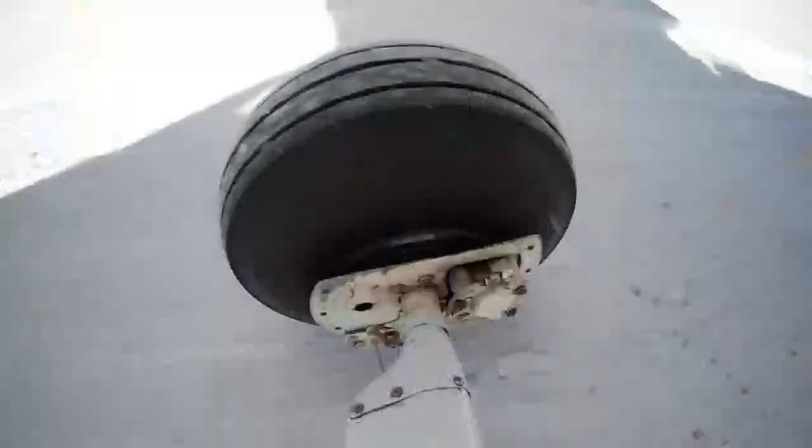Snow may seem soft, but it can cause considerable damage to an aircraft in motion. Remember, never ride the brakes while taxiing, especially in cold weather. Any snow or slush caught on the braking system will melt from the heat generated by brake usage. It can then refreeze once the aircraft is airborne, causing the wheels to become stuck in place.

The unsuspecting pilot is now in a situation of having little or no control of the aircraft during the landing roll. Be particularly careful when arriving at an unfamiliar aerodrome. In some cases, the snow is removed from the runway and piled up just to the side of the runway surface. This usually isn't a problem if you land on the center line.

However, if you choose to land to the side of the center line for operational reasons, or if you drift right or left, the snowbanks can present a considerable hazard.

Finally, be aware of snow removal vehicles. If you want to depart, it's best to wait until they finish clearing the snow. It'll probably make it easier for you anyway.

If you're inbound to an uncontrolled aerodrome that's being cleared, you'll need to wait until the snow removal vehicles leave the runway. You may consider diverting to another airport, but make sure you have enough fuel to make it there with at least the proper reserves.

If you're unable to wait for the runway to be cleared, make a precautionary low-level pass over the runway to alert the snow removal vehicles to your intention of landing. In some cases, they'll be able to leave the runway area and allow you to land.

Winter flying can be a lot of fun, but remember to plan ahead. Take your time, and if in doubt about your ability to handle the ground conditions, save the flying for another day.

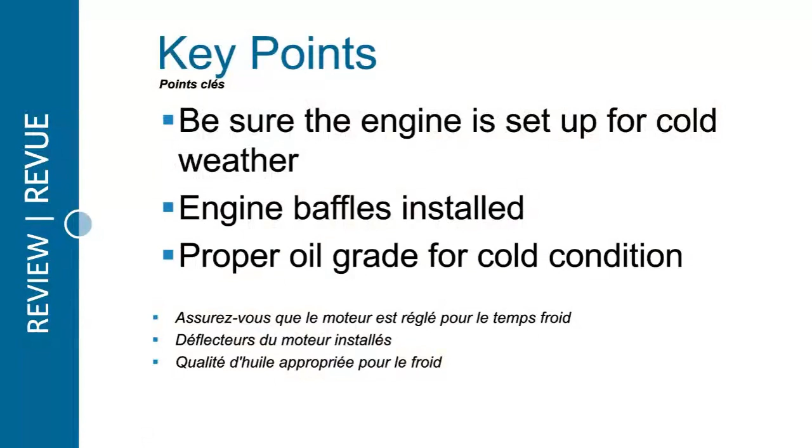So let's review the key points from the video. Be sure the engine is set up for cold weather: engine baffles installed, proper oil grade for cold conditions. Avoid overpriming and flooding during difficult starts. Minimum idle of 1,000 RPM to allow for proper warming, and keep an eye on oil pressure and temperature during warm-up.

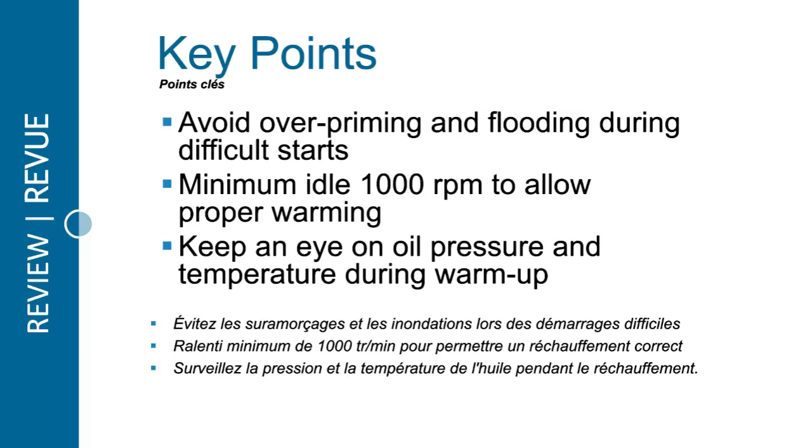Listen for unusual noises during warm-up. Don't start the run-up until temperatures are in the green, and check for carb ice before takeoff. No sudden power changes; keep it smooth and avoid sudden power decrease to avoid shock cooling. Use cowl flaps or power settings to keep temperatures in the recommended range, and clear the engine every 500 feet during low power descents.

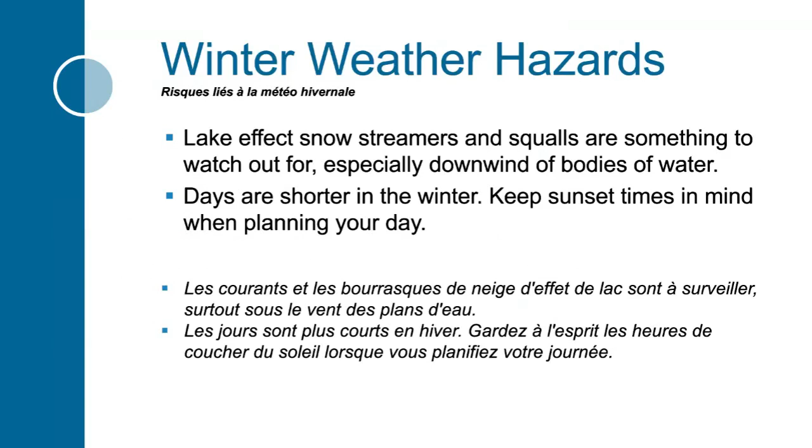Whiteouts. Whiteouts are one of the unique hazards of winter flying. The term describes winter visibility where it becomes impossible to distinguish between the horizon and the ground due to snowfall, blowing snow, or lack of contrast between the ground and sky, rendering the horizon invisible.

Height perception is also affected, and more than one pilot has flown into the ground while thinking they still had plenty of clearance. Whiteouts also describe a severe reduction in visual range caused by snowfall and/or blowing snow.

And another word on whiteouts. It's common to think of whiteouts as loss of all visibility due to blowing snow. For example, helicopters can create their own local zone of whiteout caused by downwash in a hover. Keeping hover time to a minimum will alleviate this situation.

Yet ironically, loss of visual contact can occur in clear air when a featureless expanse of snow-covered landscape blends into the horizon. There are many visual clues in the landscape to assist in discerning objects and judging distances. Shadows, glare, contrast in color, and clarity in distant objects are all used when flying in visual flight conditions.

But flat, featureless terrain, such as a lake covered in snow, in combination with a low ceiling or diffused light, can remove these clues. These conditions can lure pilots into relying on inadequate visual references, like a dark line in the distance, while paying little or no attention to the cockpit instruments.

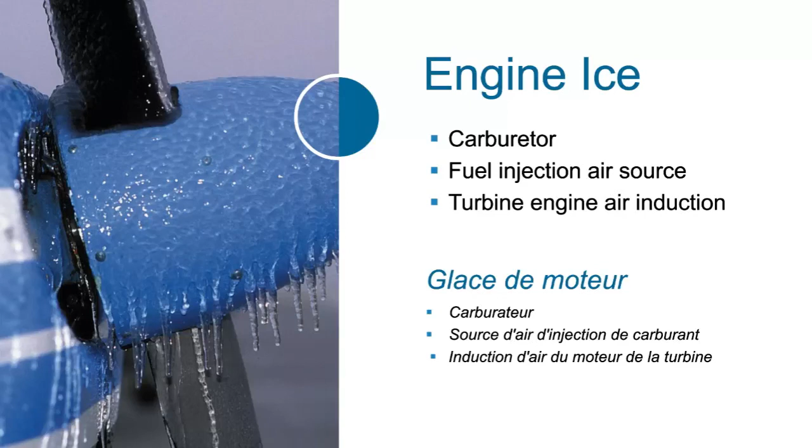According to AOPA statistics, icing played a role in 12% of all weather-related accidents during the 10-year period between 1990 and 2000. Of these icing incidents, more than half were attributed to induction, carburetor, or air intake ice.

Very few GA aircraft are ever tested with icing contamination in flight. So once you start to see ice on your airframe, you become a test pilot. This is not recommended. Airframe ice is associated with cold temperatures plus moisture in the air.

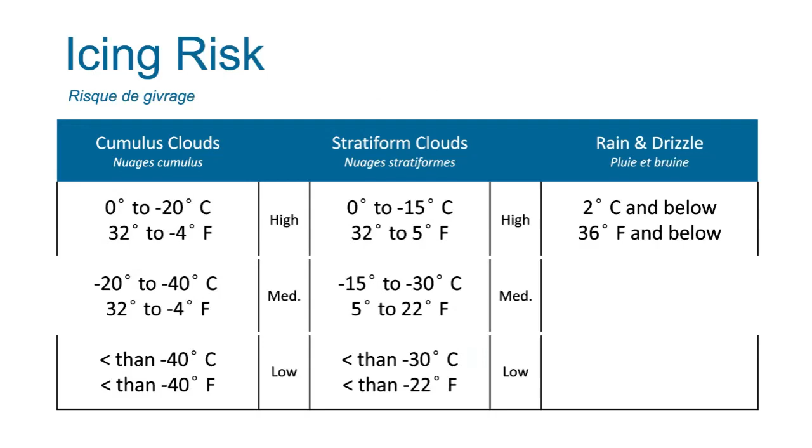Although we usually associate ice with cloud, it is possible to see ice buildup in clear or hazy looking air. Structural ice is the stuff that sticks to the outside of the airplane. It is described as clear, rime, or mixed.

Rime ice has a rough, milky white appearance and generally follows the contours of the surface. Much of it can be removed by de-icing systems or prevented by anti-ice.

Clear or glaze ice is sometimes clear and smooth, but usually contains some air pockets that result in a lumpy, translucent appearance. The larger the accretion, the less glaze ice conforms to the shape of the wing. The shape is often characterized by the presence of upper and lower horns. Clear ice is denser, harder, and more transparent than rime ice, and is generally hard to break.

Mixed ice is a combination of rime and clear ice.

Although the weight of the ice accumulation can be a factor in the fate of the aircraft, the effects of ice on aerodynamics of flight surfaces are far more important and deadly. Ice can distort the flow of air over the wing and significantly increase drag. This not only diminishes the wing's maximum lift capability, but may adversely affect the handling characteristics of the airplane as well. Wind tunnel and flight tests have shown that frost, snow, and ice accumulations on the leading edge or upper surface of the wing, no thicker or rougher than a piece of coarse sandpaper, can reduce lift by 30% and increase drag up to 40%.

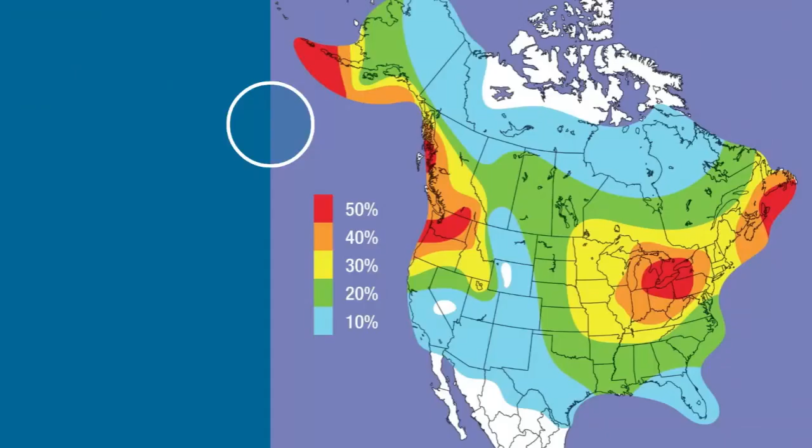Ice can form on aircraft surfaces at +2 degrees Celsius or colder when liquid water is present. I'm sure that number is surprising. Why do we say +2 degrees rather than 0? As air passes over a wing, the pressure above the wing drops. As the pressure drops, so does the temperature. This is also what happens in the venturi of a carburetor. So that +2 degree air quickly becomes freezing air as your airframe passes through it.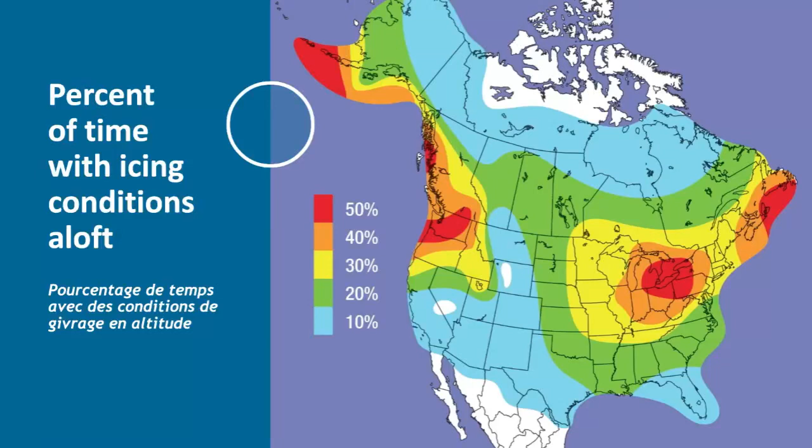Although it is fairly easy to predict where the large areas of icing potential exist, the accurate prediction of specific icing areas and altitudes poses more of a quandary. Mountains, bodies of water, wind, temperature, moisture, and atmospheric pressure all play ever-changing roles in weather making.

In GA, we often think that VFR pilots will not be too concerned about icing because they never penetrate cloud, where the biggest risk occurs. While this is true, there are also big risks for VFR pilots that are associated with wet precipitation, rain, and freezing rain. Freezing rain and drizzle are the ultimate enemy that can drastically roughen large surface areas or distort airfoil shapes and make flight extremely dangerous or impossible in a matter of a few minutes.

Freezing rain occurs when precipitation from warmer air aloft falls through a temperature inversion into below freezing air underneath. Large droplets may impact and freeze on the airframe.

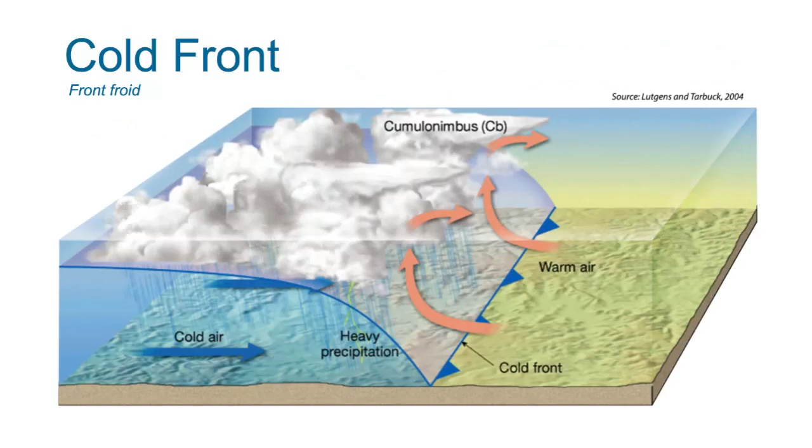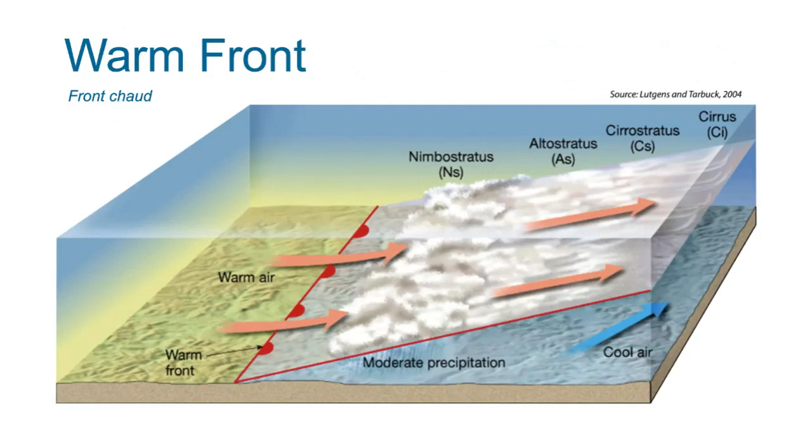Along a cold front, the cold air plows under the warm air, lifting it more rapidly and resulting in the formation of moist cumulus clouds. Along a warm front, the warmer air tends to slide over the colder air, forming stratus clouds conducive to icing. As you approach the front, the clouds quickly build and the clear air between the layers rapidly disappears.

Exposure to frontal conditions can be minimized by choosing a route that penetrates the front perpendicular to the frontal line.

Smart ice flying begins on the ground. For VFR operations, with the exceptions of freezing rain, freezing drizzle, and carburetor icing, staying clear of clouds by a safe margin solves the icing problem. For pilots choosing to go IFR, it becomes more complicated, and that is deep enough of a subject to warrant a seminar all of its own.

Immediate is the word of the day. When you encounter ice, especially as a VFR pilot, the best time to take action is right now. And the best action to take is a 180-degree turn to get out of the situation. Let's take a look at this short video on avoiding airframe icing.

When it comes to flying, planes and ice don't mix. Freezing rain occurs most often in fall and spring. It can occur at any altitude, and it's the most dangerous type of precipitation to aviation safety.

Even planes equipped with anti-icing equipment are not meant to handle continuous icing. Any buildup of ice on an aircraft destroys the smooth aerodynamic airflow, affecting its performance. Add to this the weight of the ice, and you soon have an aircraft that can't maintain airspeed, even with maximum power. Avoiding ice starts on the ground.

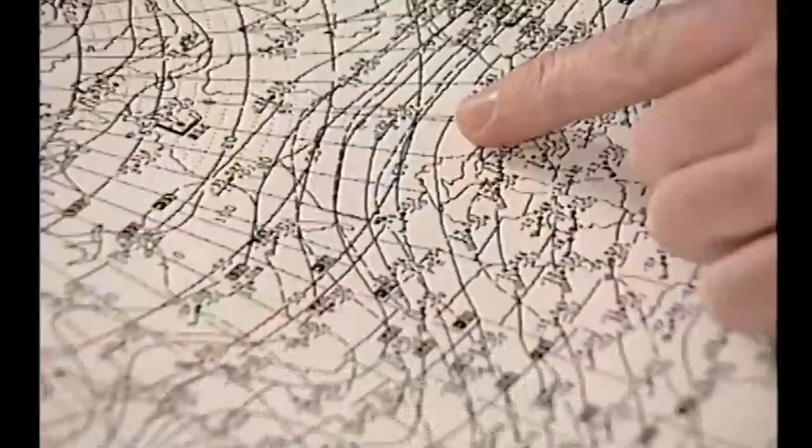Before you go, check the weather for possible icing on takeoff, landing, and en route. Request any recent pilot weather reports or PIREPs from the nearest flight service station, and if possible, plan your route around known icing. Aviation regulations require that all snow, ice, or frost must be removed before flying.

Don't assume that loose snow will blow off in flight. Besides, there might be some ice hiding underneath. If you're caught in potential icing conditions, anticipate it and get out as soon as possible. Ice can build up rapidly.

Don't fly at altitudes where icing is forecast, and if encountered, do something about it at the first sign. Don't wait. Start to work your way out immediately, either by changing altitude, turning back towards good weather, or getting down as quickly as possible, or a combination of all three. Ice accumulation degrades stability and increases stall speed, so fly your approach with extra power and airspeed. And file a PIREP as soon as possible, either in the air or on the ground.

Actual weather reports from pilots provide the most reliable information for forecasters and other pilots. Pilots know that no ice is good advice. Avoid ice conditions at all times. Remember, it's better to be on the ground wishing you're in the air than being in the air wishing you weren't.

Effects of airframe ice. Ice on the wings and tail changes the aerodynamics of the airplane. When ice accumulates on the wing, you can expect the need to increase the angle of attack to compensate for the loss of lift from the wings. This will, of course, be accompanied by a loss of airspeed and the loss of climb performance. Beyond a certain point, you will not be able to maintain level flight.

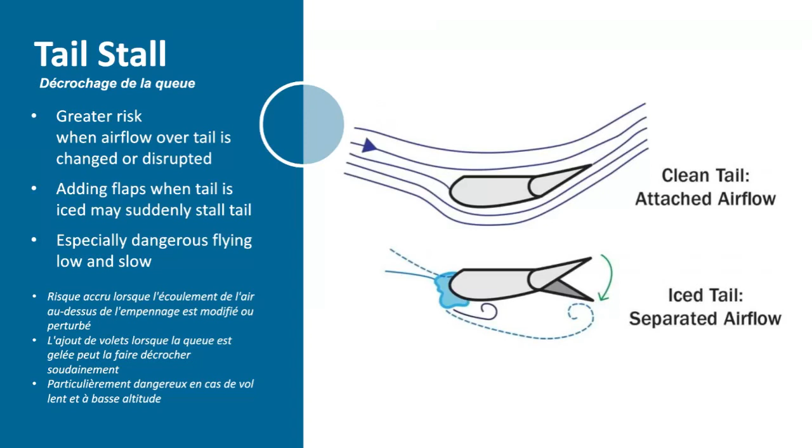Induction ice is a big contributor to accidents. There are two kinds of induction system icing: carburetor icing, which affects engines with carburetors, and air intake blockage, which affects both carbureted and fuel-injected air engines. Induction icing accidents top the charts as the number one cause of icing accidents, comprising a whopping 52%.

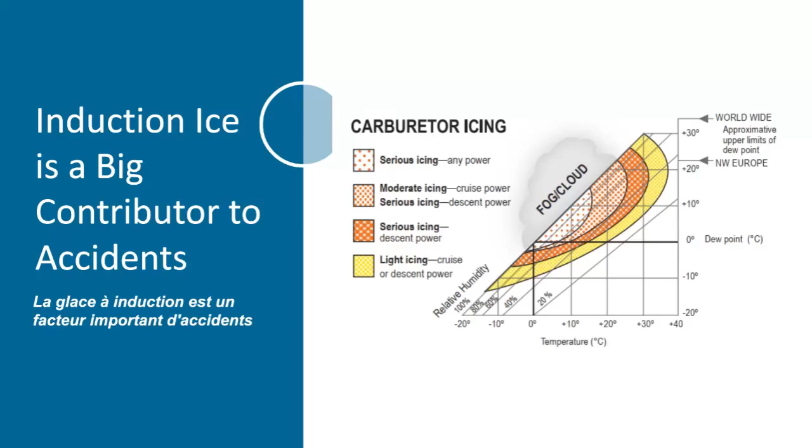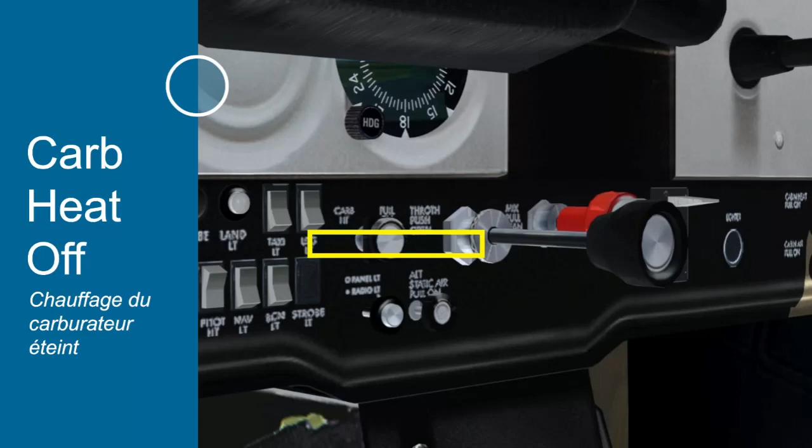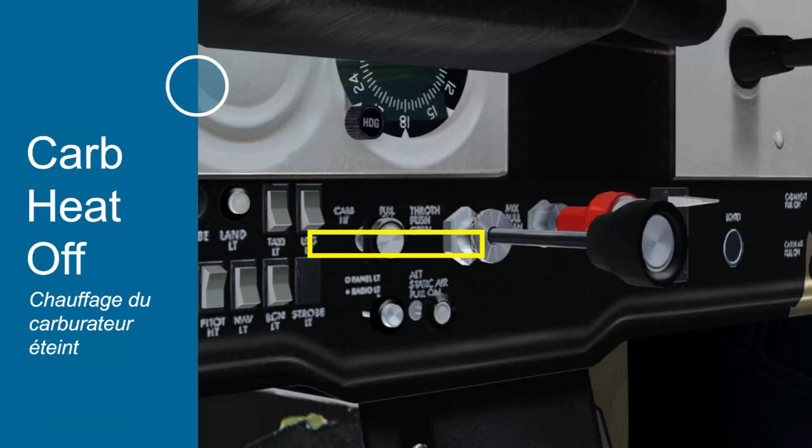Unless preventative or corrective measures are taken, carburetor icing can cause complete power failure. In a normally aspirated engine, the carburation process can lower the temperature of the incoming air as much as 60 degrees Fahrenheit. If the moisture content is high enough, ice will form on the throttle plate and the venturi, gradually shutting off the supply of air to the engine. Even a small amount of carburetor ice will result in a power loss, indicated by reduced RPM with a fixed pitch propeller and a loss of manifold pressure with a constant speed propeller, and may make the engine run rough.

At the first indication of carburetor ice, apply full carburetor heat and leave it on. The engine may run rough as the ice melts and goes through, but it will smooth out again. When the engine runs smoothly, turn off the heat. If you shut off the carburetor heat prematurely, the engine will build more ice and probably quit because of air starvation. The engine RPM should return to its original power setting. If the RPM drops again, fly with the carb heat on. Do not use partial heat.

With carburetor heat on, the hot air is less dense, so the mixture becomes richer, and as a result, the RPM will drop a bit further. Lean the mixture and most of the RPM loss should return. If you don't lean, fuel consumption increases. A number of fuel exhaustion accidents have resulted from miscalculations. If carburetor heat is used for landing and you decide to go around, advance the throttle smoothly, then remove the carb heat. This will ensure all available power for takeoff.

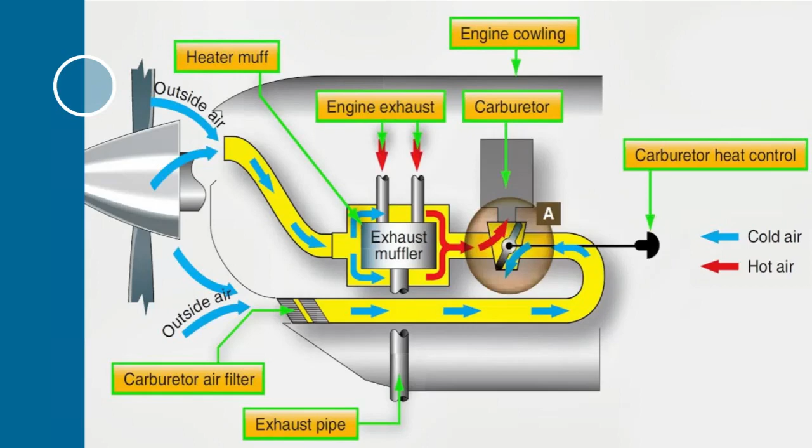Fuel-injected engines have no carburetor and therefore no carburetor ice problem. However, when conditions are favorable for structural ice, fuel-injected engines can lose power and even fail if the air filter and intake passages are blocked by ice. This can also occur in planes with carburetors. At the first sign of power loss, activate the alternate induction air door or doors. When these doors open, intake air routes through them, bypassing the ice-blocked normal induction air pathway.

Many alternate induction air systems activate automatically. These designs use spring-loaded doors. Suction in an ice-blocked air intake draws these alternate air doors open. Some older fuel-injected airplanes have alternate air doors that must be manually opened. Knobs or levers have to be physically moved to the open position in order for alternate air to reach the engine. Check the POH of your aircraft to find out how and when to use this system.

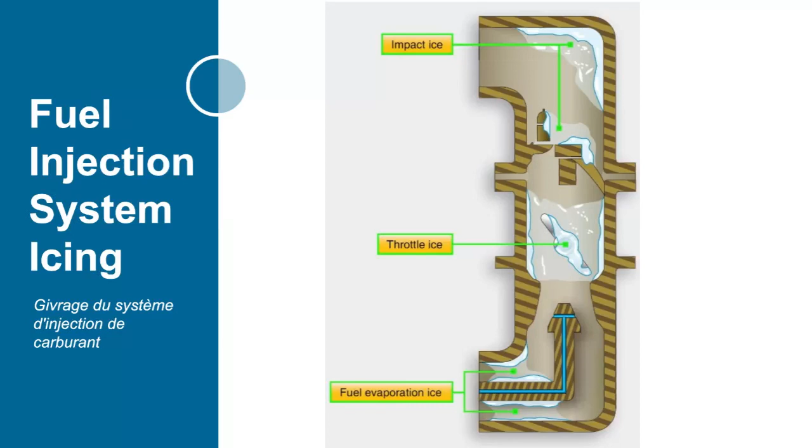Preparing for the worst, winter survival.

So, suppose the worst has happened, which is what we all plan for, right? How can we best play the cards we are dealt? First, did you dress appropriately for the weather on the route as part of your pre-flight plan?

Let's take a look at this video on dressing for survival.

Are you prepared if you have to make a forced landing? If not, you better think again before setting off. And this is especially important during these colder months. Being prepared starts off with filing a flight plan and making sure that your emergency locating transmitter is operational, because in the event of an emergency, being found quickly by search and rescue forces will increase your chances of survival.

Being prepared also means making sure that you're dressed for the conditions that prevail on the ground, en route, and at the destination. Street clothes may be adequate onboard, but remember, it can be cold out there when stranded. Lack of suitable clothing can take its toll in the race against time, especially in rain or snow. And even getting stuck at the end of a runway can mean a long, cold walk back if not dressed properly, and this includes what you wear on your feet.

An essential part of a safe flight is having an emergency kit on board. This includes extra clothing, matches, flashlights, emergency food, a first aid kit, blankets, and sleeping bags. Onboard survival equipment is not only mandated by regulations, but can mean the difference between survival or not.